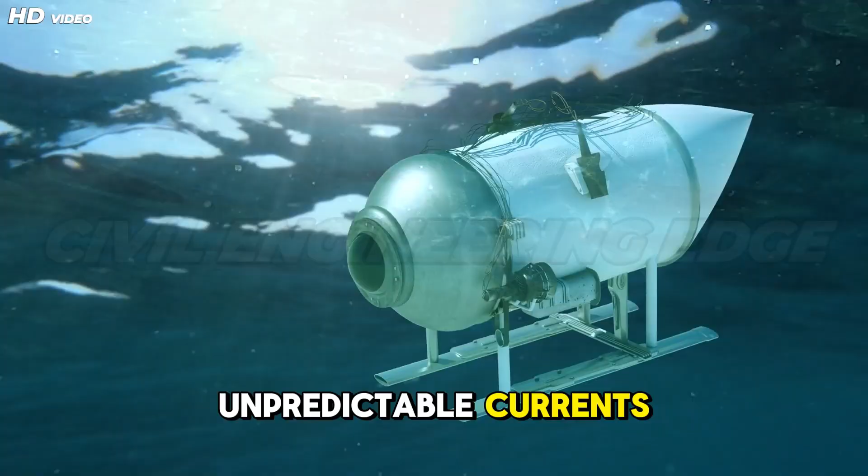Imagine building a bridge, but entirely underwater. No dry land, no stable ground, just crushing water pressure, unpredictable currents, and zero visibility. How do engineers pour concrete that doesn't wash away? How do they weld steel where humans can barely survive? And how do they stabilize structures that weigh more than skyscrapers on soft seabeds hundreds of feet below the surface?

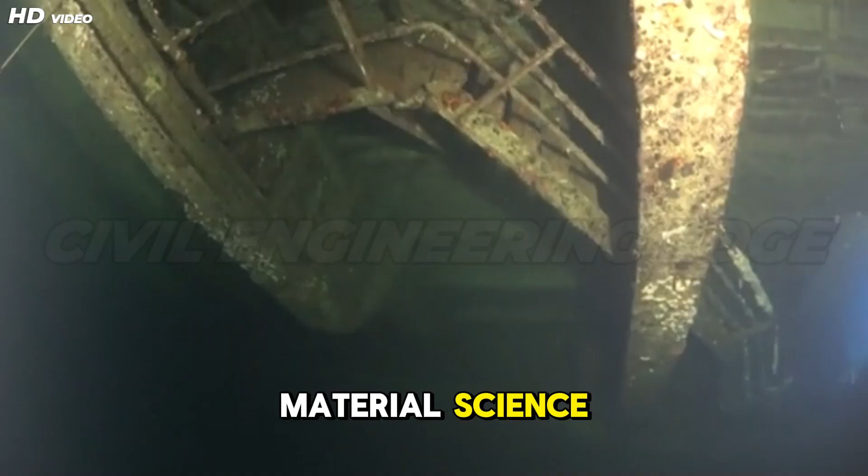Welcome to the astonishing world of underwater construction, where engineers don't just fight gravity, they fight the ocean itself. From submerged tunnels beneath busy shipping lanes to massive offshore foundations standing strong against waves and corrosion, this is a realm where precision, material science, and engineering courage collide. Today, we're diving deep into the secrets that make the impossible possible.

Diving into the deep. Why underwater construction? Underwater construction exists because the modern world refuses to stop at coastlines. As cities grow denser and transportation demands increase, engineers are forced to look beneath rivers, seas, and oceans to create faster, safer, and more efficient connections. Unlike traditional construction, underwater projects are not optional luxuries. They are engineering necessities driven by geography, population pressure, and global trade.

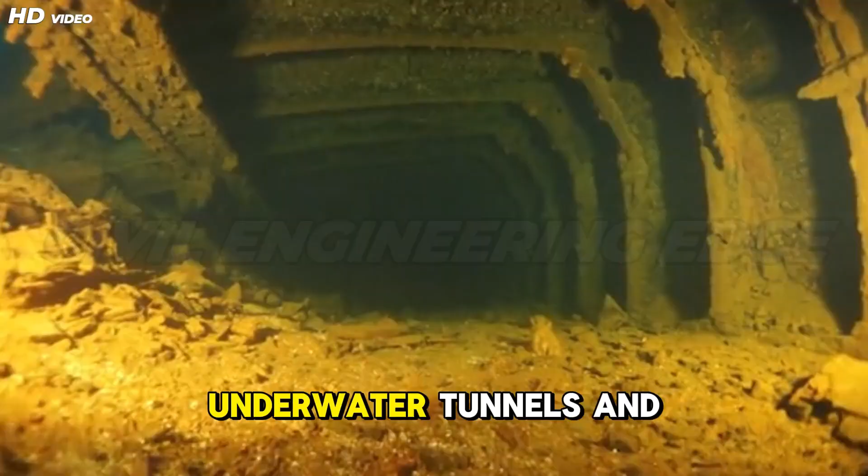Surface-level solutions such as bridges are not always feasible. Busy shipping lanes require unobstructed navigation. Deep waters make bridge foundations impractical, and environmental constraints limit above-water structures. In these situations, underwater tunnels and submerged foundations become the only viable solution. These projects allow uninterrupted transport while preserving the surface environment.

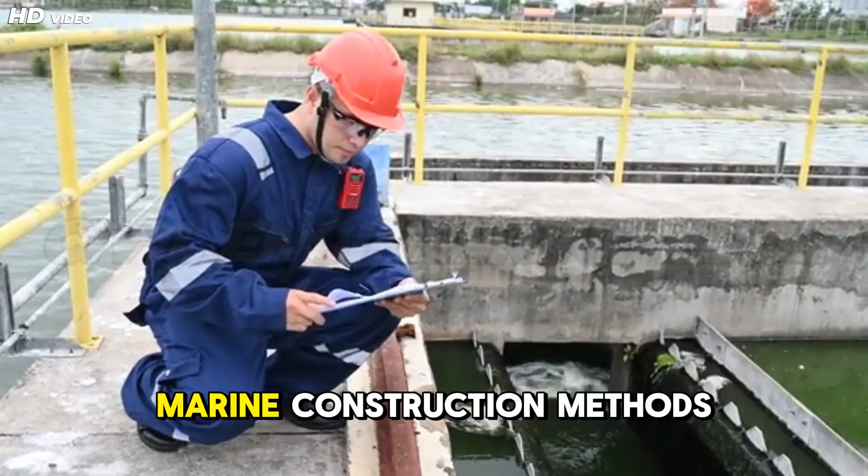But underwater construction is more than problem solving. It represents the evolution of civil engineering. It pushes boundaries in geotechnical engineering, structural design, marine construction methods, and material science. Every underwater project must address complex challenges such as hydrostatic pressure, buoyancy forces, seabed instability, corrosion, and long-term durability.

What makes underwater construction remarkable is not just the final structure, but the process itself. Engineers must design systems that can be built remotely, monitored digitally, and maintained for decades in hostile environments. Each project becomes a laboratory of innovation, where mistakes are costly and precision is non-negotiable. In essence, underwater construction exists because modern civilization demands connection without compromise, even when nature places the most extreme obstacles in the way.

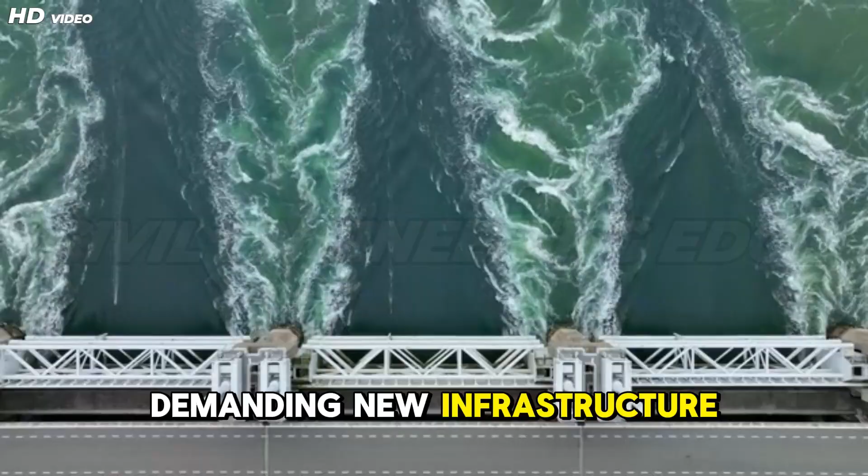Beyond bridges: the hidden world beneath the waves demanding new infrastructure. When most people think of infrastructure, they imagine roads, bridges, and skyscrapers. But beneath the water's surface lies a hidden world of critical infrastructure that keeps modern society functioning. This submerged realm includes transportation tunnels, offshore energy platforms, underwater pipelines, communication cables, and marine research facilities, systems that operate silently yet powerfully below the waves.

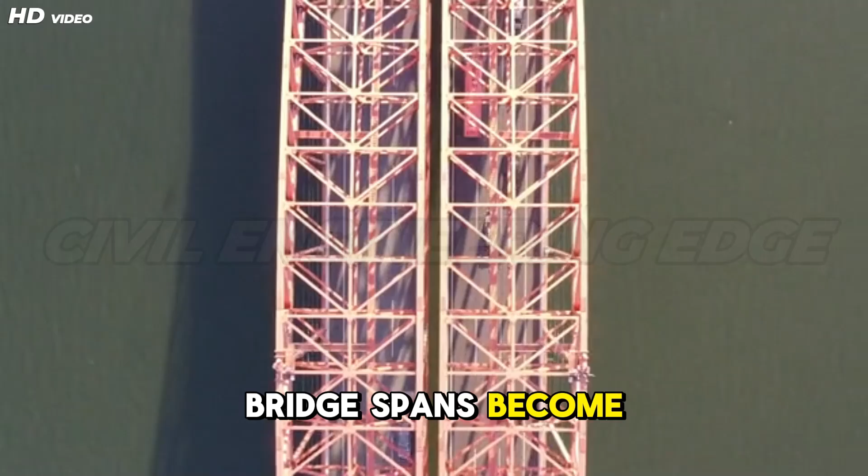Traditional bridges often dominate visual landscapes, but they come with limitations. In deep or wide water bodies, bridge spans become extremely expensive, vulnerable to ship collisions, and exposed to harsh weather conditions. Underwater tunnels eliminate these risks by passing below navigation channels, allowing uninterrupted maritime traffic while providing safer, more resilient transport routes.

Beyond transportation, underwater infrastructure supports global energy needs. Offshore wind turbines, oil and gas platforms, and subsea pipelines rely heavily on underwater construction techniques. These structures must anchor securely to seabeds that may consist of soft clay, sand, or fractured rock, each demanding specialized foundation solutions.

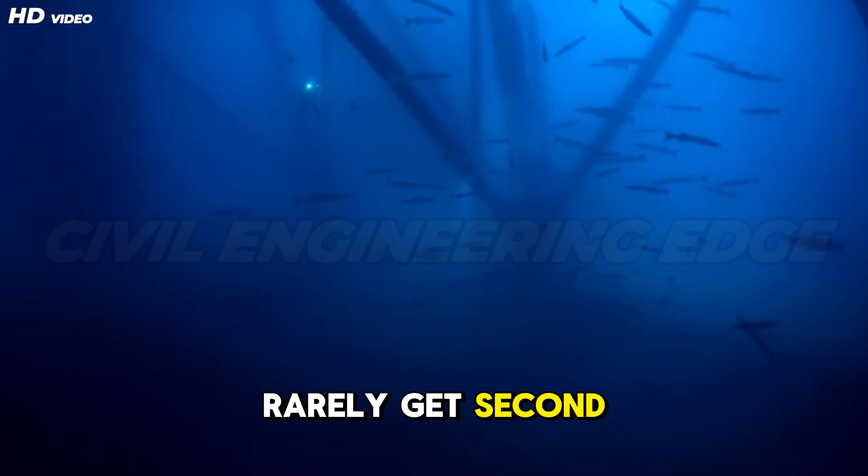The ocean floor is also home to vital communication networks. Submarine cables carry over 95% of global internet traffic, requiring precise installation and protection against currents, seismic activity, and human interference. What makes this underwater world extraordinary is that engineers rarely get second chances. Visibility is limited, access is difficult, and repairs are expensive. Every design decision must account for decades of service life under constant exposure to salt water, pressure, and biological activity.

Underwater construction isn't just about building below water, it's about creating invisible lifelines that support economies, security, and daily life across the planet.

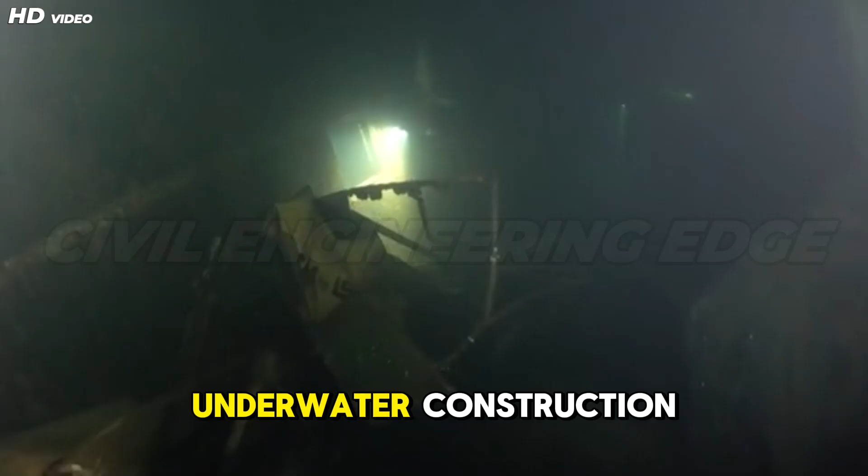Economic and strategic imperatives driving these ambitious projects. Underwater construction is not driven by curiosity alone, it is powered by economic necessity and strategic planning. In an interconnected global economy, delays in transportation, energy supply, or data transmission translate directly into financial losses. Submerged tunnels and offshore structures often provide the most efficient and long-term solutions.

From an economic perspective, underwater tunnels significantly reduce travel time between major urban centers, increasing productivity and regional integration. Cities separated by rivers or seas can function as a single economic zone when connected below water. This improves logistics, boosts tourism, and raises property values on both sides of the crossing.

Strategically, underwater infrastructure enhances national security and resilience. Subsea tunnels are less vulnerable to extreme weather, terrorism, or surface-level accidents compared to bridges. Military logistics, emergency evacuations, and essential supply routes benefit from protected underwater corridors.

Energy security is another major driver. Offshore oil, gas, and renewable energy installations require robust underwater foundations and pipelines to deliver power reliably. Countries investing in offshore wind farms depend heavily on underwater construction to meet sustainability goals and reduce carbon emissions.

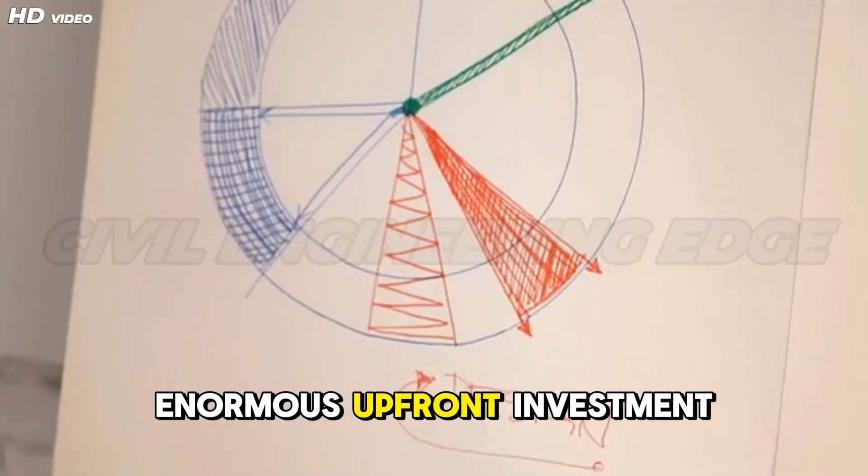There is also a geopolitical dimension. Nations compete to control trade routes, seabed resources, and communication networks. Advanced underwater construction capability reflects technological leadership and engineering strength. Although these projects demand enormous upfront investment, their long-term economic returns often outweigh costs. When designed correctly, underwater structures can serve reliably for 100 years or more, making them strategic assets rather than expenses.

The sheer scale and engineering audacity required to build underwater. Building underwater is not just difficult, it is audacious. Engineers must plan projects where gravity, buoyancy, pressure, and corrosion all work against them simultaneously. Unlike surface construction, where adjustments can be made easily, underwater construction demands near-perfect execution from the very beginning.

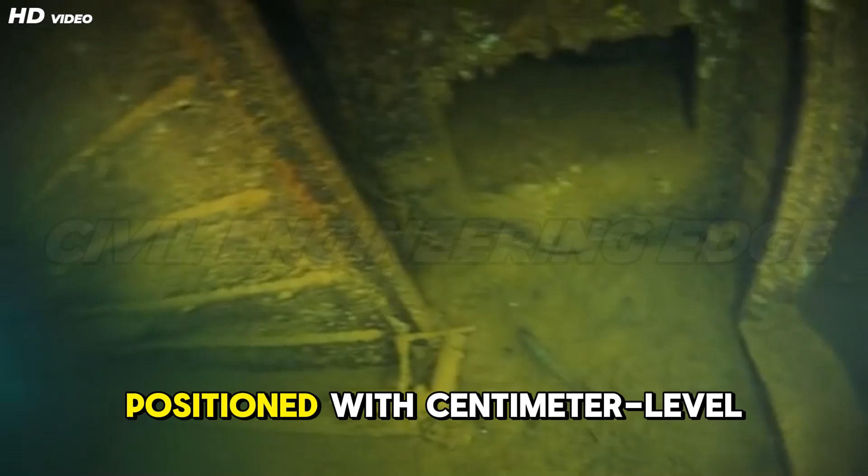Consider the scale alone. Immersed tunnel elements can weigh tens of thousands of tons, yet they must be floated, positioned with centimeter-level accuracy, and sunk into prepared trenches on the seabed. All this happens while accounting for tides, currents, and weather windows that may last only a few hours.

Hydrostatic pressure increases dramatically with depth, placing extreme stress on structures and construction equipment. At the same time, buoyant forces try to lift massive components upward, requiring precise ballast control. Engineers must design systems that remain stable during construction and for decades afterward.

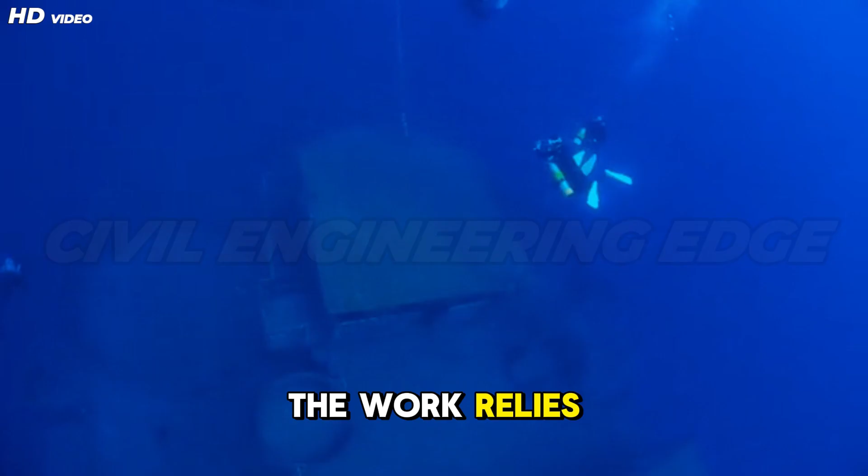Human access is limited, so much of the work relies on remotely operated vehicles, divers trained for high-risk environments, and advanced monitoring systems. Every weld, joint, and seal must perform flawlessly because underwater repairs are complex and expensive.

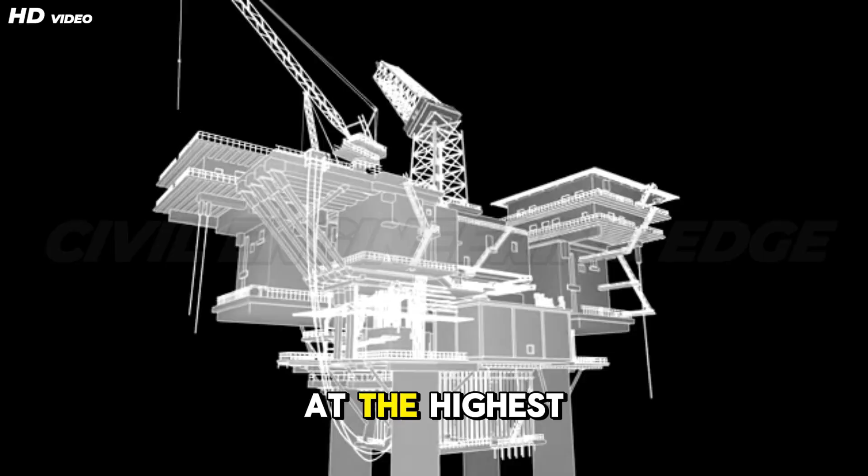What truly defines underwater construction is the engineering mindset, a willingness to operate where failure is not an option. These projects combine structural engineering, geotechnical analysis, fluid mechanics, material science, and project management at the highest level. In short, underwater construction is where civil engineering proves its boldest claim. If it can be imagined, it can be built, even beneath the ocean floor.

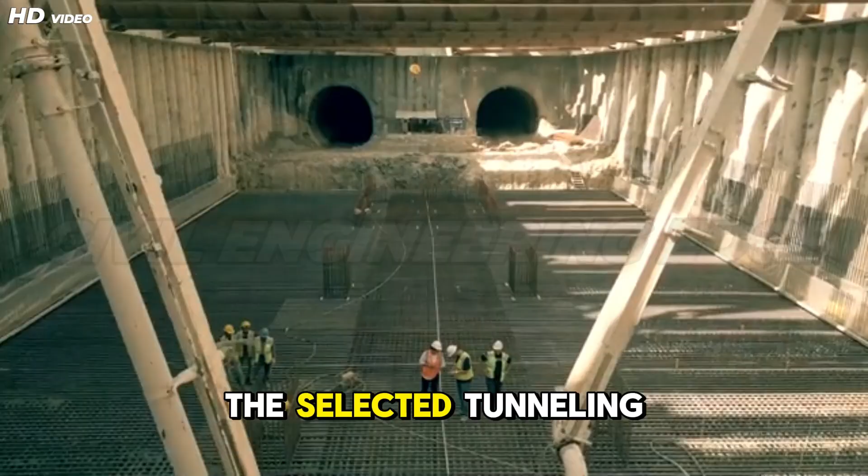The blueprint for submerged passages: tunneling techniques. When engineers decide to build a tunnel underwater, the first and most critical question is how. Unlike land tunnels, underwater tunnels must resist hydrostatic pressure, prevent leakage, and remain stable on or beneath soft seabeds. The selected tunneling technique becomes the backbone of the entire project, influencing cost, construction time, safety, and long-term durability.

Underwater tunneling techniques are broadly categorized based on geology, water depth, environmental conditions, and navigation requirements above. Shallow water crossings often favor construction on the seabed itself, while deeper or rockier conditions demand excavation through the ground below. Each method comes with its own engineering philosophy and risk profile.

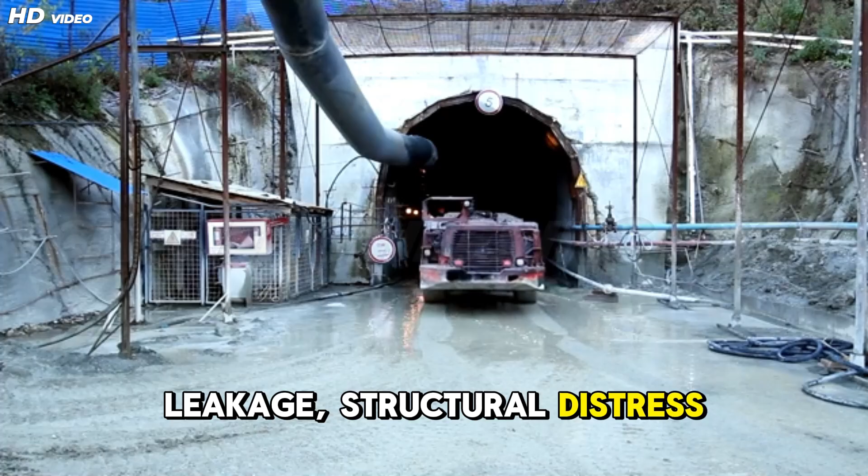Precision planning begins long before construction starts. Engineers conduct extensive bathymetric surveys, geotechnical investigations, seismic studies, and hydraulic modeling. These studies determine soil strength, rock quality, groundwater pressure, and potential settlement risks. Even minor miscalculations can lead to leakage, structural distress, or catastrophic failure.

Unlike bridges, where visibility allows continuous inspection, underwater tunnels must be designed as sealed systems capable of resisting water ingress for decades. Structural linings, waterproof membranes, and joint systems must work perfectly together.

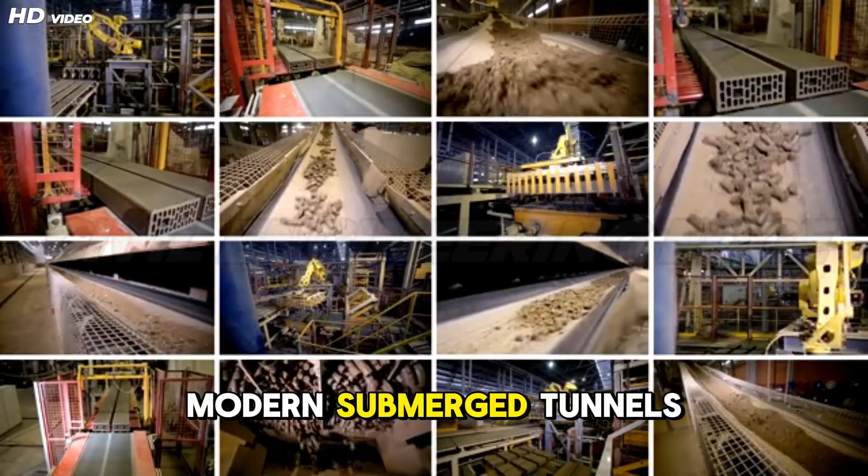Modern submerged tunnels represent a fusion of structural engineering, marine construction, and advanced machinery. From floating massive concrete sections into position to boring deep beneath riverbeds with tunnel boring machines, underwater tunneling showcases the peak of civil engineering coordination. At its core, underwater tunneling is not just about excavation, it is about mastering the environment where water dominates every design decision.

Immersed tube method: prefabricated sections sunk and joined. The immersed tube method is one of the most iconic and visually fascinating techniques in underwater tunnel construction. Instead of digging entirely underground, engineers build massive tunnel sections called elements on land in controlled casting yards. These reinforced concrete or steel elements are typically 100 to 150 meters long and weigh thousands of tons.

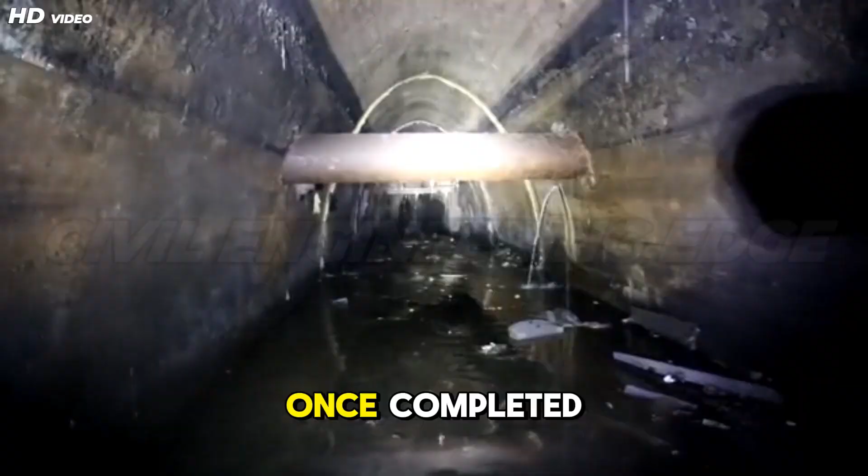Once completed, each element is sealed at both ends and floated like a ship to the tunnel site. A carefully dredged trench is prepared on the seabed, often lined with gravel or bedding material for uniform support. Using GPS positioning, ballast tanks, and tugboats, engineers slowly sink the tunnel element into the trench with millimeter-level accuracy.

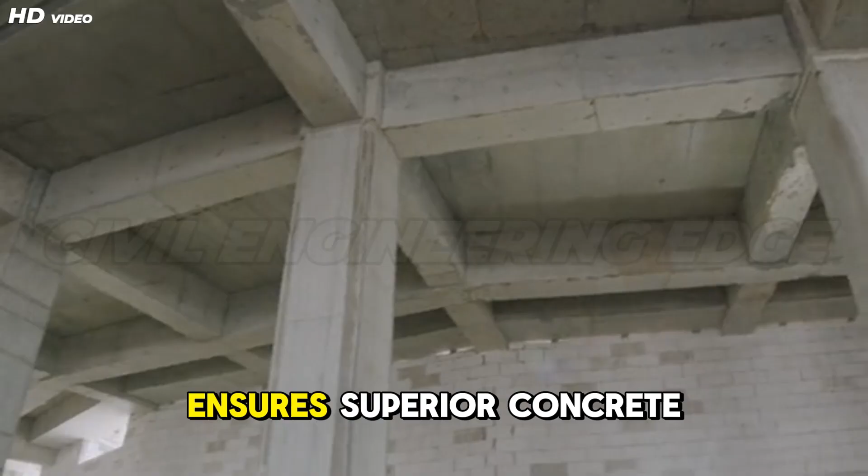This method has been widely adopted in Asia for large-scale projects such as underwater metro systems and sea crossings, where shallow water depths and soft marine soils are common. The controlled prefabrication ensures superior concrete quality, better waterproofing, and faster installation compared to in situ construction.

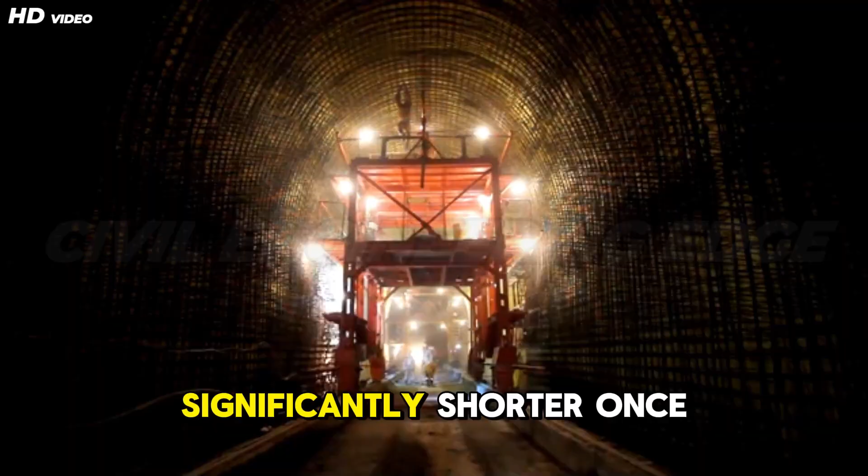One of the biggest advantages of the immersed tube method is reduced disruption to surface navigation. Shipping traffic can continue above while tunnel elements are placed below. Additionally, construction time is significantly shorter once installation begins.

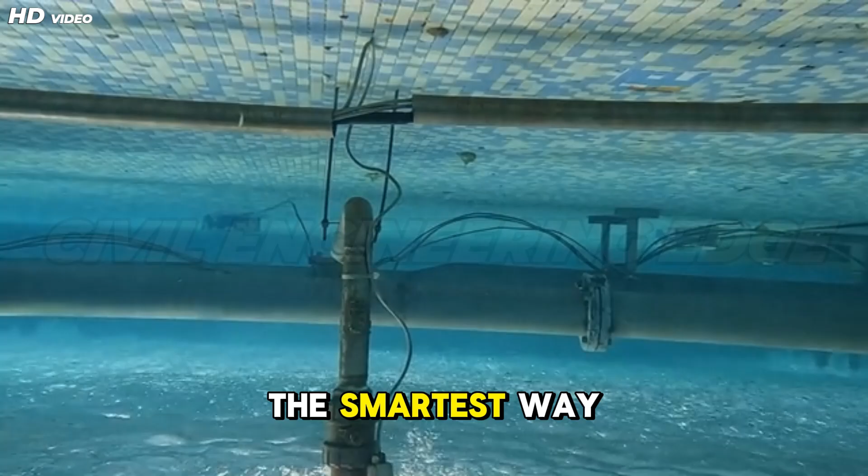However, the method demands extreme precision. Any misalignment during placement can compromise joint integrity. Engineers must also account for buoyancy forces, seabed settlement, and seismic activity. The immersed tube method proves that sometimes the smartest way to build underwater is not to dig, but to assemble.

Bored tunnels, giant TBMs beneath rivers and seas. When water depths increase or seabed conditions become complex, engineers turn to bored tunnels constructed using tunnel boring machines, or TBMs. These massive machines, sometimes over 15 meters in diameter, excavate tunnels deep beneath riverbeds or seabeds, adapting land-based tunneling technology for underwater challenges.

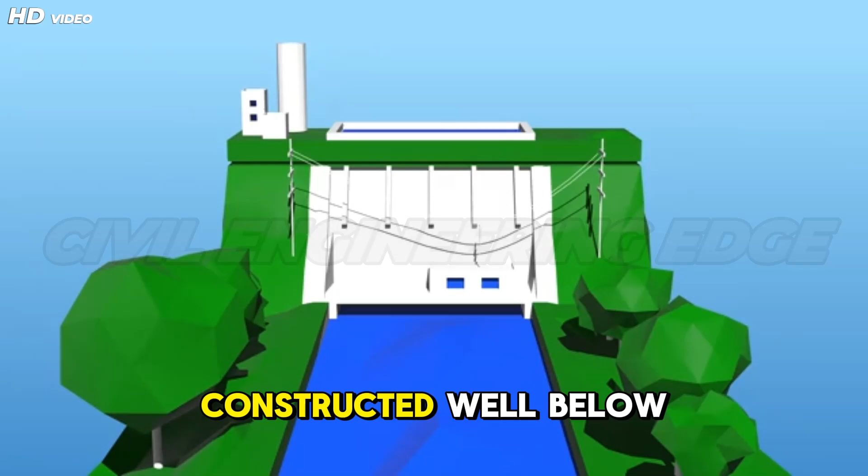Underwater bored tunnels are typically constructed well below the seabed to avoid direct water pressure and navigation risks. The surrounding soil or rock acts as a natural barrier, but groundwater pressure remains a major concern. To address this, specialized TBMs such as Earth Pressure Balance (EPB) or Slurry Shield TBMs are used. These machines maintain pressure at the tunnel face, preventing water and soil from rushing in.

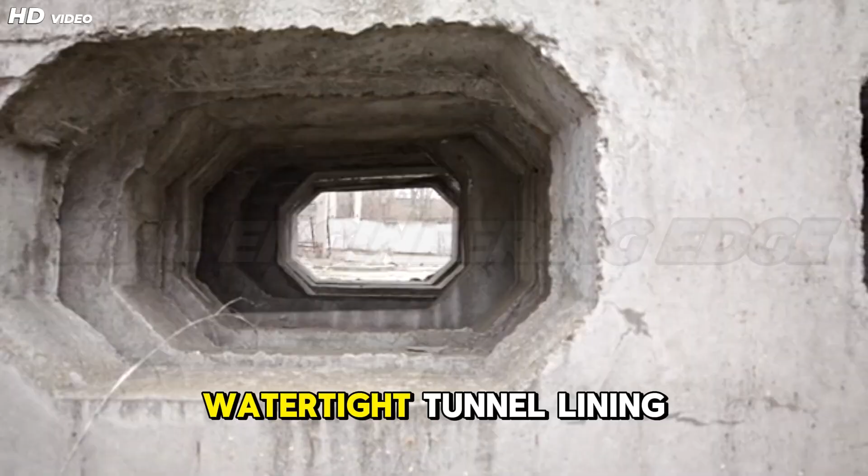As the TBM advances, it installs precast concrete lining segments immediately behind the cutter head, forming a continuous, watertight tunnel lining. One major advantage of bored tunnels is minimal impact on marine ecosystems and surface activities. Since excavation happens deep underground, shipping lanes, ports, and coastal infrastructure remain unaffected.

However, bored tunneling underwater requires extreme control. Variations in soil layers, high pore water pressure, and machine breakdowns can lead to ground settlement or flooding. Continuous monitoring of face pressure, settlement, and alignment is essential. Bored tunnels represent engineering patience and precision. Unlike immersed tubes, progress is slow but highly controlled. They are a testament to how civil engineering adapts traditional methods to conquer one of the most hostile construction environments on Earth.

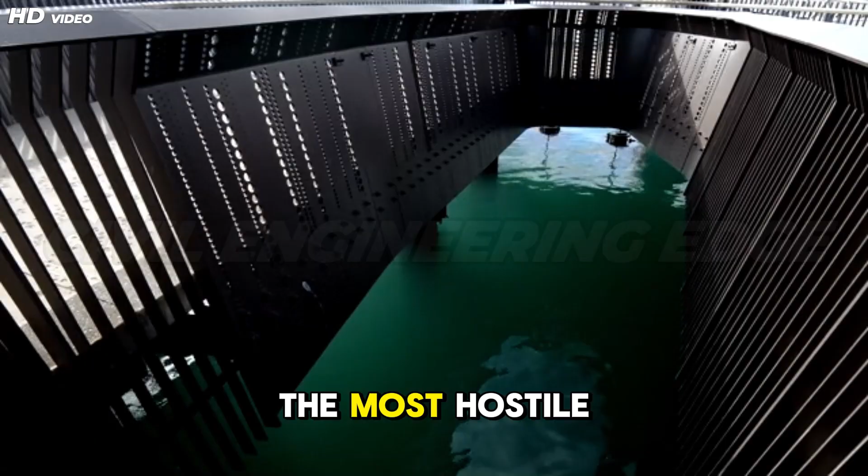Connecting the sections, watertight seals under immense pressure. The most critical moment in underwater tunnel construction is not excavation, it is connection. Whether using immersed tubes or bored tunnels, creating a perfectly watertight joint under immense water pressure is a true engineering test.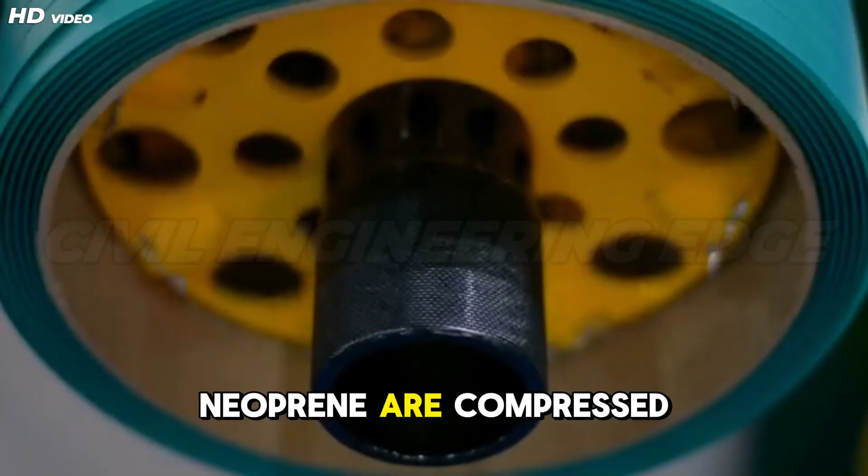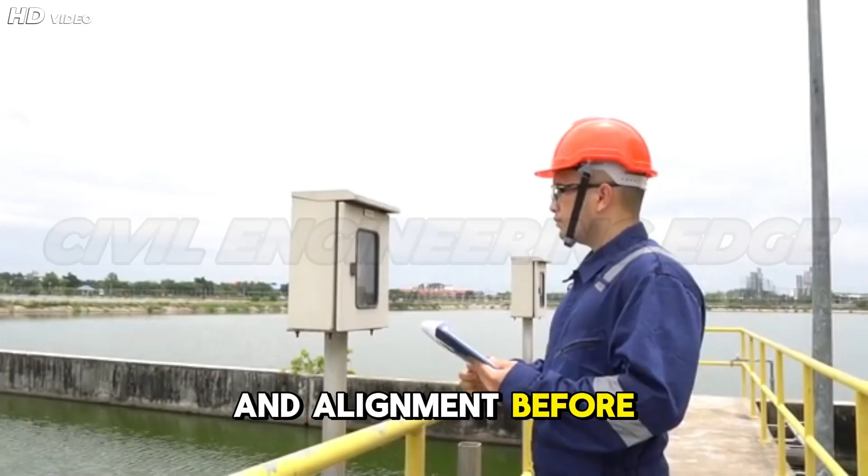In immersed tube tunnels, each prefabricated element is joined underwater using advanced sealing systems. Rubber gaskets often made of synthetic neoprene are compressed between tunnel segments. When the elements are pulled together using hydraulic jacks, the gasket deforms, creating a tight seal capable of withstanding external water pressure. Temporary bulkheads are removed only after the joint is confirmed watertight. Engineers monitor leakage, pressure behavior, and alignment before proceeding to the next element. A single faulty joint can compromise the entire tunnel.

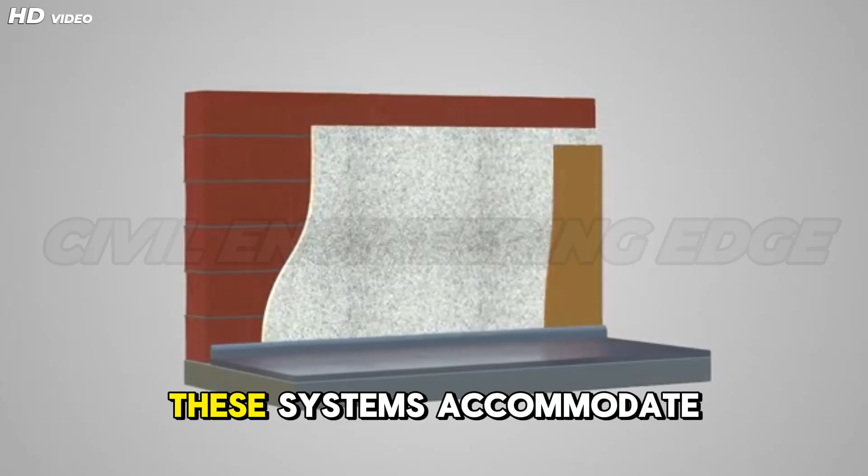For bored tunnels, precast lining segments are bolted together with precision. Each segment joint contains multiple sealing layers, including elastomeric gaskets and secondary waterproof membranes. These systems accommodate slight movements caused by temperature changes, settlement, or seismic activity. Water pressure at depth can exceed several bars, meaning even microscopic gaps can lead to long-term seepage. Therefore, joint tolerances are measured in millimeters, and quality control is relentless.

Advanced sensors are embedded to monitor joint behavior throughout the tunnel's life. Modern tunnels are not just sealed, they are actively monitored systems. In underwater construction, a tunnel is only as strong as its weakest joint. That's why connecting sections beneath the water isn't just construction, it is engineering precision at its absolute finest.

Anchoring giants, building offshore structures. Offshore structures, whether oil platforms, wind turbines, or subsea terminals, face forces unlike any land-based construction. Waves, currents, tides, wind, and seismic activity act simultaneously, while corrosion and fatigue work silently over decades. The greatest challenge is not building upward, but anchoring downward into an unpredictable seabed.

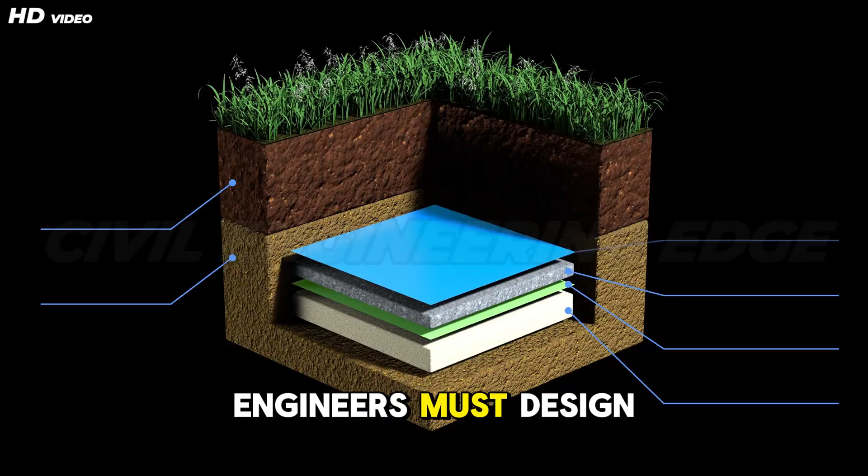Unlike buildings on land, offshore structures cannot rely on shallow foundations. The seabed may consist of soft clay, loose sand, or fractured rock, each behaving differently under load. Engineers must design foundations that resist vertical loads, lateral wave forces, uplift due to buoyancy, and cyclic fatigue caused by continuous wave action. Foundation choice depends on water depth, soil conditions, environmental loads, and construction feasibility.

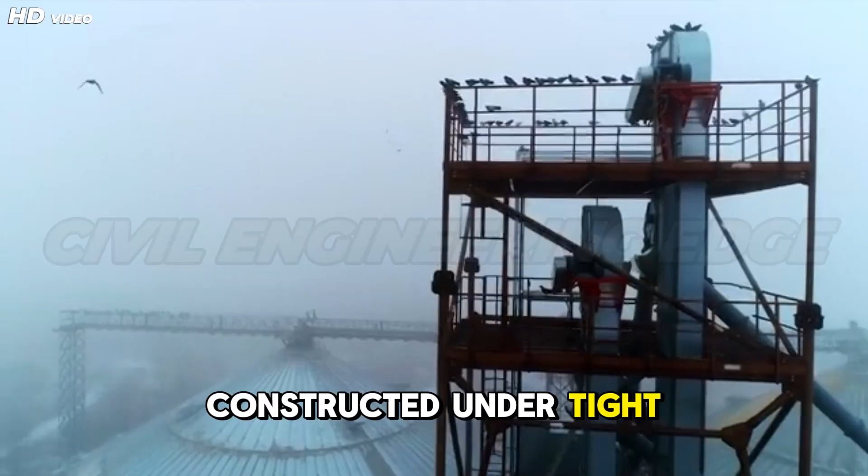Shallow waters with strong seabeds favor massive gravity-based systems, while deeper waters or weaker soils demand pile-supported foundations. Each solution requires precise geotechnical analysis and extensive physical modeling. Offshore foundations are typically constructed under tight weather windows. A small miscalculation in timing or positioning can delay projects by months. Once installed, these foundations must perform with minimal maintenance, often for 30 to 100 years.

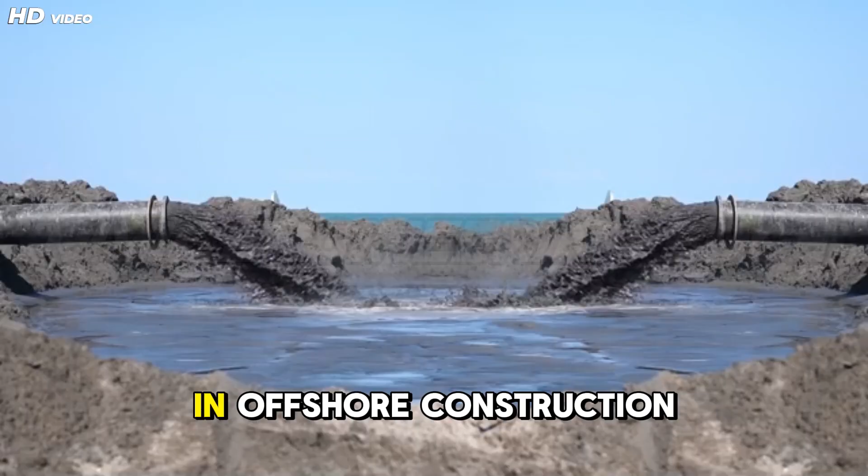What makes offshore foundation engineering remarkable is its scale. Individual foundation units can weigh more than skyscrapers, yet must be placed with centimeter-level accuracy on the ocean floor. In offshore construction, foundations are not just supports, they are the difference between structural stability and total failure.

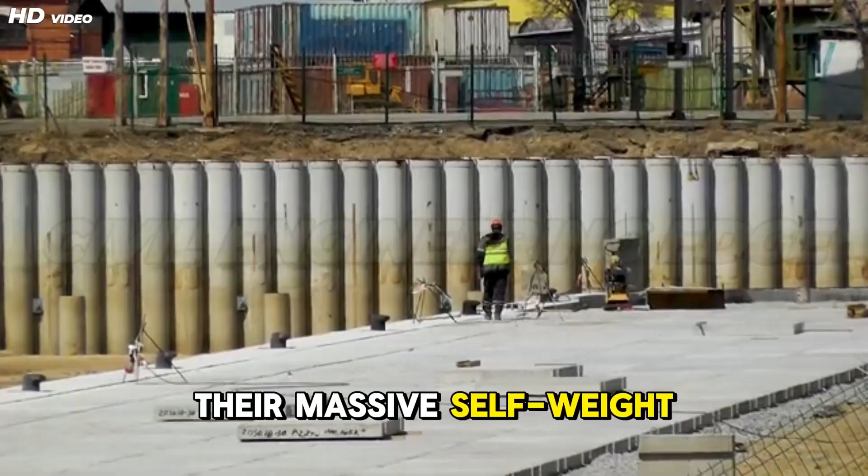Gravity-based foundations, massive concrete caissons. Gravity-based foundations, or GBFs, rely on one powerful principle: weight. These foundations are enormous concrete structures, known as caissons, designed to resist environmental forces simply by their massive self-weight. Once placed on the seabed, gravity alone keeps them firmly anchored.

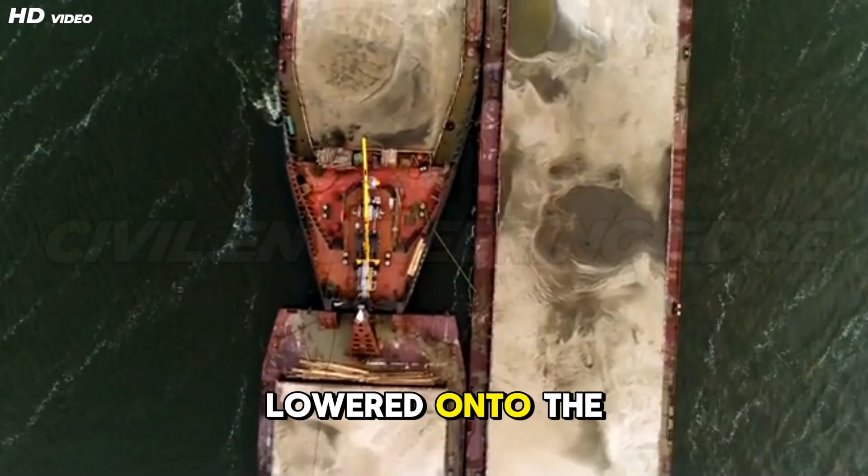GBFs are typically constructed in dry docks or coastal fabrication yards. High-strength reinforced concrete is used to form hollow caissons, which are then floated to the offshore site. After precise positioning, the caissons are slowly lowered onto the seabed. Once in place, the hollow chambers are filled with ballast materials such as sand, gravel, or seawater. This added mass increases stability, allowing the structure to resist wave action, sliding, overturning, and uplift forces caused by buoyancy.

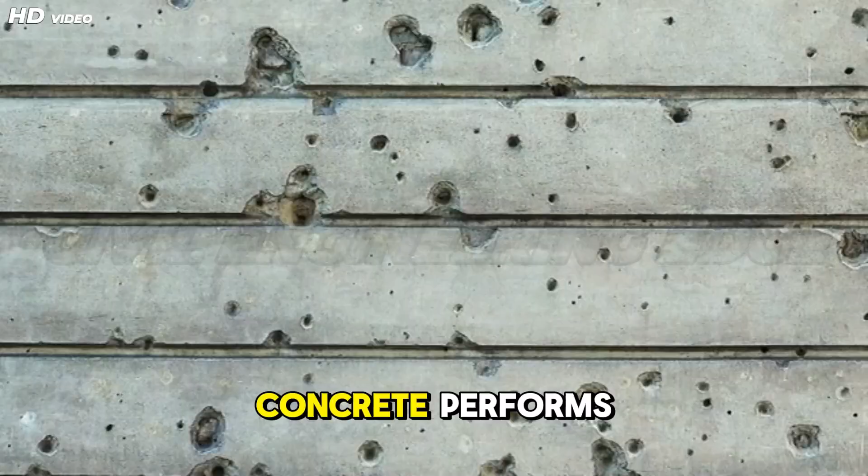Gravity-based foundations are commonly used for offshore oil platforms and wind turbines in shallow to moderate water depths. They perform exceptionally well on firm seabeds and offer excellent resistance to fatigue loads. One major advantage of GBFs is durability. Concrete performs well in marine environments when properly designed, offering high resistance to corrosion compared to steel. Maintenance requirements are relatively low over the structure's life.

However, GBFs require extensive seabed preparation. The seabed must be leveled and strengthened to avoid differential settlement. Transporting and installing such massive structures also demands specialized vessels and calm weather conditions. Gravity-based foundations demonstrate how engineering sometimes chooses brute force executed with precision to conquer the ocean.

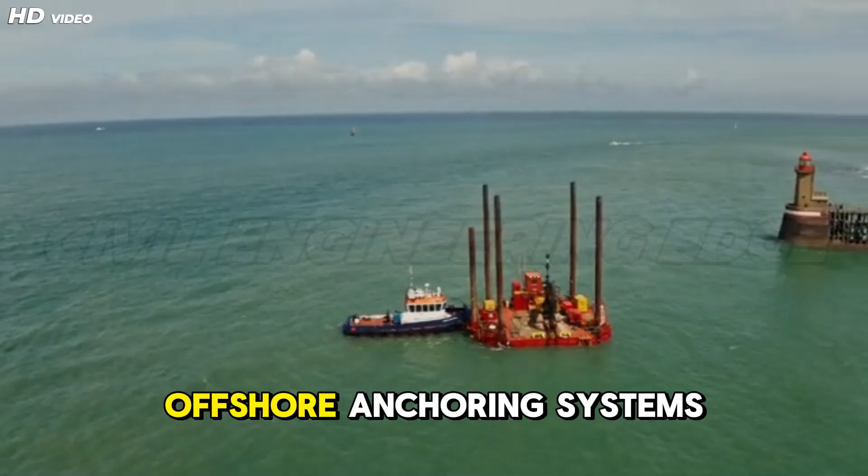Pile foundations: driving colossal piles into the seabed. When gravity alone isn't enough, engineers turn to pile foundations, one of the most versatile and reliable offshore anchoring systems. These foundations use long, slender piles driven deep into the seabed to transfer loads to stronger soil or rock layers below. Offshore piles are typically made of steel and can reach diameters of several meters and lengths exceeding 80 meters.

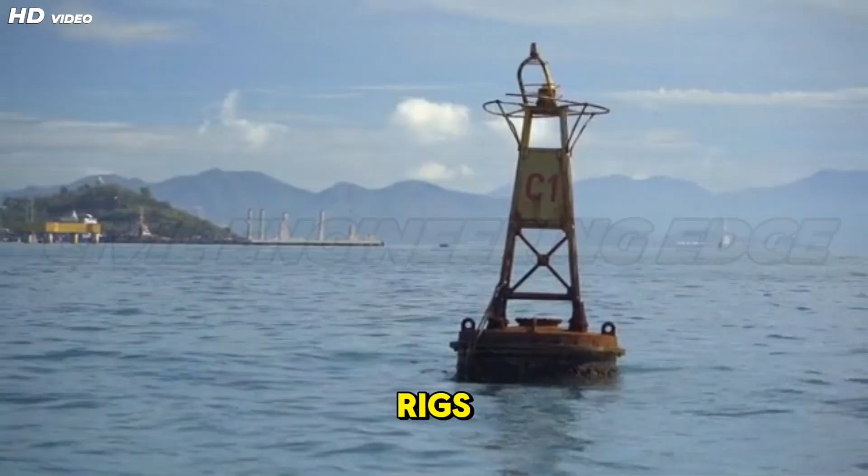They are installed using hydraulic hammers or vibratory drivers mounted on floating platforms or jack-up rigs. Each pile must be driven with extreme accuracy to achieve the required penetration depth and alignment. Pile foundations excel in challenging ground conditions such as soft clay, layered soils, or deep water. They resist vertical loads, lateral wave forces, and cyclic fatigue caused by repeated wave action. Groups of piles are often used to distribute loads and enhance stability.

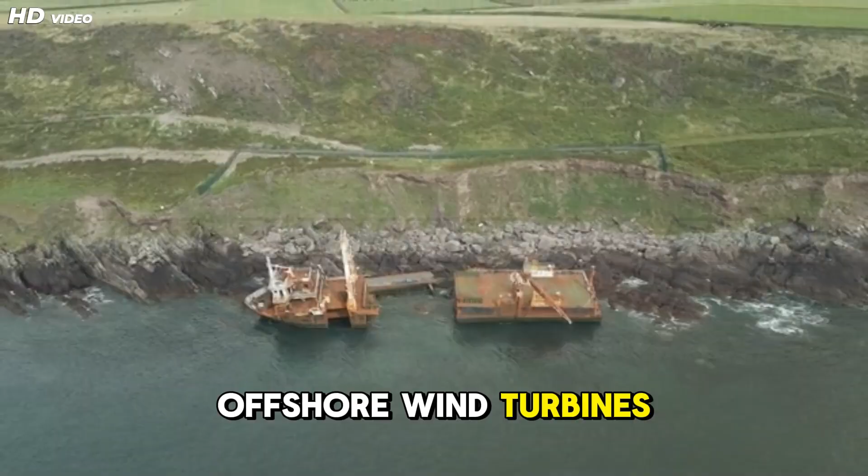A key engineering challenge is predicting pile behavior under dynamic marine loads. Engineers rely on advanced soil modeling, pile load testing, and real-time monitoring during installation to ensure performance. Pile foundations are widely used for offshore wind turbines, bridges, and deep water platforms. Their modular nature allows flexibility in design and easier adaptation to varying seabed conditions.

However, pile driving generates noise and vibrations, which can impact marine life. Modern projects incorporate noise mitigation techniques such as bubble curtains and controlled hammering. Pile foundations showcase engineering adaptability, going deep when surface stability cannot be trusted.

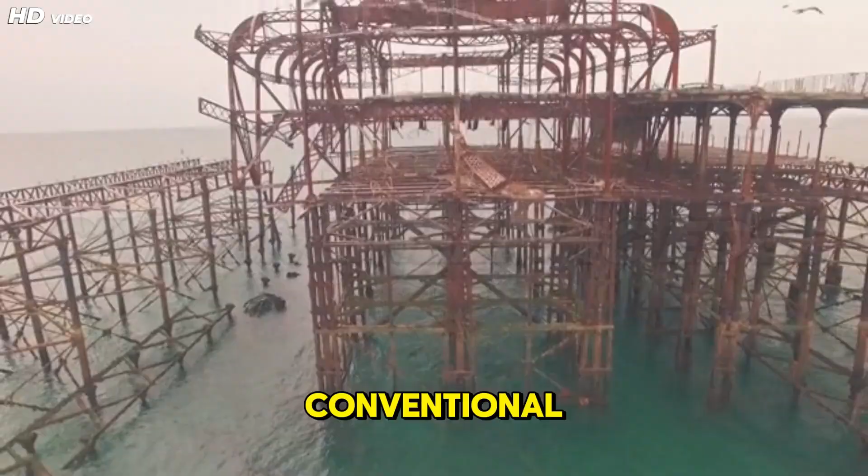The evolution of materials, from steel to self-healing concrete. Materials are the silent heroes of underwater construction. Early offshore structures relied heavily on conventional steel and concrete, but harsh marine environments quickly exposed their limitations. Today, materials science plays a critical role in ensuring long-term durability and safety.

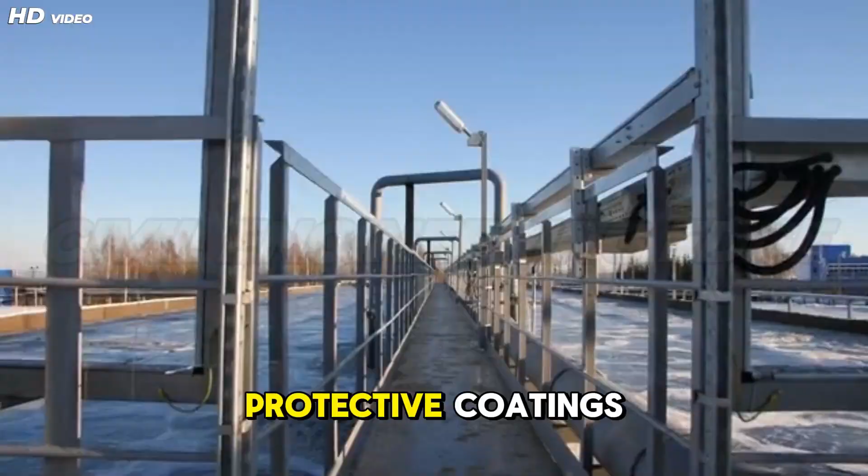Steel remains widely used due to its high strength and flexibility, especially in pile foundations and jacket structures. However, corrosion caused by salt water is a constant threat. Protective coatings, cathodic protection systems, and corrosion-resistant alloys are now standard design elements.

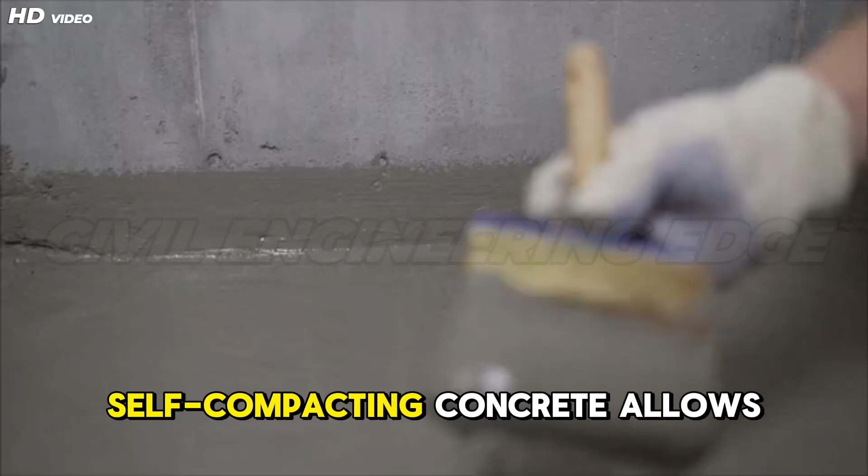Concrete has evolved dramatically for marine use. Modern underwater concrete includes low permeability mixes, supplementary cementitious materials, and chemical admixtures that improve durability. Self-compacting concrete allows placement underwater without segregation, ensuring uniform strength.

One of the most exciting advancements is self-healing concrete. Embedded microcapsules or bacteria activate when cracks form, producing minerals that seal the cracks automatically. This significantly extends service life and reduces maintenance needs. Advanced composites, such as fiber-reinforced polymers (FRP), are increasingly used for strengthening and corrosion protection. These materials are lightweight, highly durable, and resistant to marine degradation.

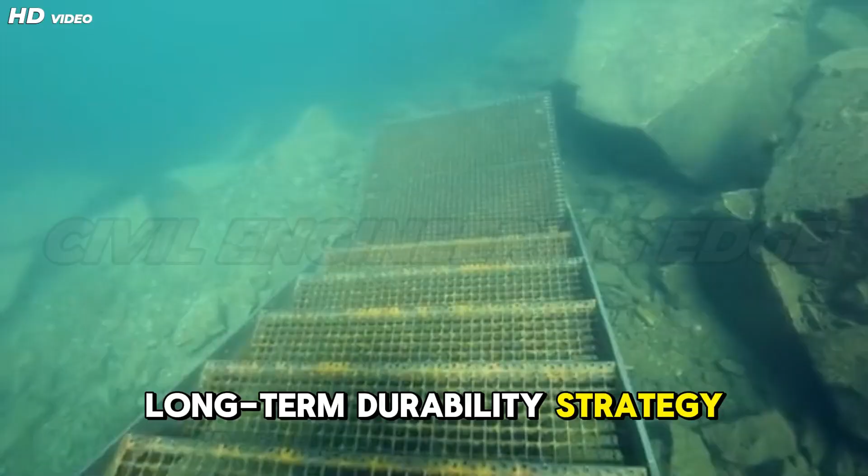The evolution of materials has transformed underwater construction from a constant maintenance battle into a long-term durability strategy. In the ocean, where repairs are costly and difficult, smart materials are not a luxury, they are a necessity.

Battling the deep: overcoming immense pressures and corrosive environments. Underwater construction is not simply about building below water, it is about surviving the deep. Unlike land-based structures, underwater systems face constant physical and chemical attacks from their environment. Pressure, corrosion, waves, and seismic forces act continuously, not occasionally.

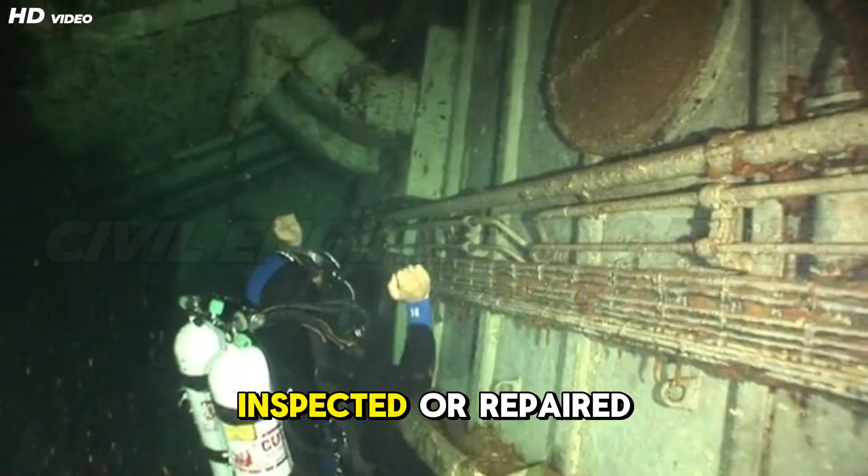At increasing depths, hydrostatic pressure rises rapidly, placing enormous compressive loads on structural elements. Simultaneously, seawater aggressively corrodes metals, penetrates concrete, and weakens materials over time. Unlike surface structures, underwater installations cannot be easily inspected or repaired, making durability a primary design objective.

In addition to static forces, underwater structures must withstand dynamic actions. Waves, tides, and currents generate cyclic loads that cause fatigue. Seismic events introduce sudden ground motions, while scour alters seabed support conditions unexpectedly.

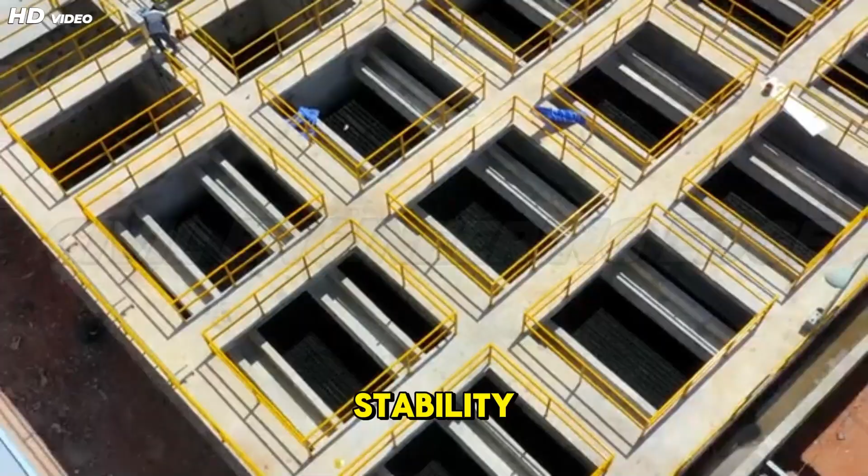To combat these challenges, engineers adopt a multi-layered defense strategy. Structural geometry, material selection, protective systems, and monitoring technologies all work together to ensure long-term stability. Safety factors are higher, redundancy is mandatory, and design life expectations often exceed 50 to 100 years. Every underwater structure represents a balance between resisting nature and adapting to it. Failure to account for even one environmental factor can lead to catastrophic consequences.

This battle with the deep defines the discipline of marine and offshore engineering, where survival is not measured in days or years, but in generations of service beneath the sea.

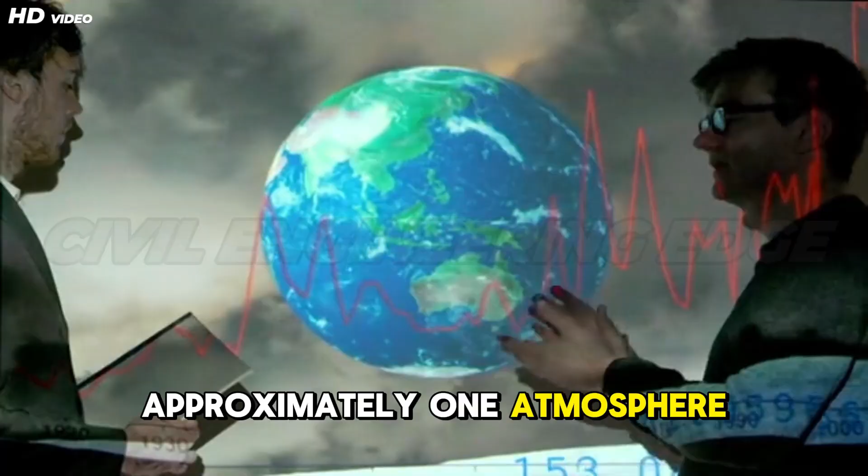Hydrostatic pressure, engineering against crushing forces. Hydrostatic pressure is one of the most unforgiving forces in underwater construction. For every 10 meters of water depth, pressure increases by approximately 1 atmosphere. At significant depths, this translates into forces capable of crushing submarines, let alone conventional structures.

Underwater tunnels, foundations, and offshore platforms must be designed to resist this pressure continuously. Unlike transient loads such as wind, hydrostatic pressure acts uniformly and relentlessly on every exposed surface. Even small openings or weak joints can become points of failure.

Engineers respond by optimizing structural shapes and thicknesses. Circular and curved sections are preferred because they distribute pressure evenly, minimizing stress concentrations. Tunnel linings, caissons, and offshore shells are designed as pressure-resisting structures rather than load-carrying frames.

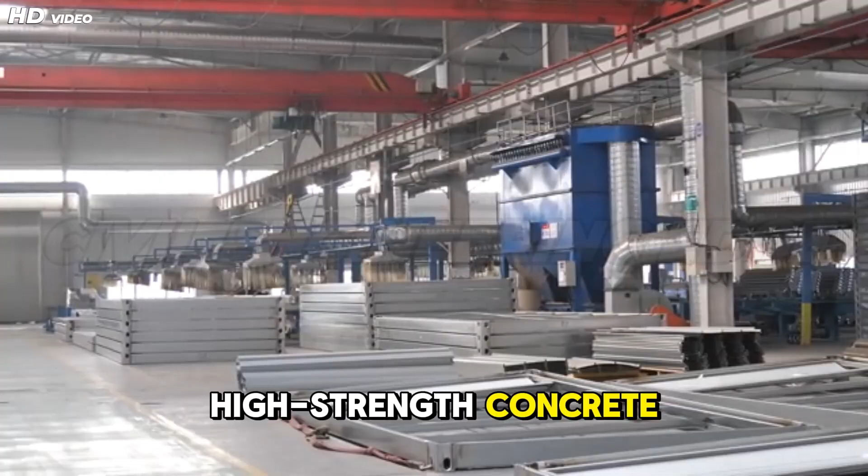Material selection is critical. High-strength concrete with low permeability reduces water ingress, while steel components are designed with sufficient thickness to prevent buckling. Waterproof membranes and multi-layer sealing systems add additional protection.

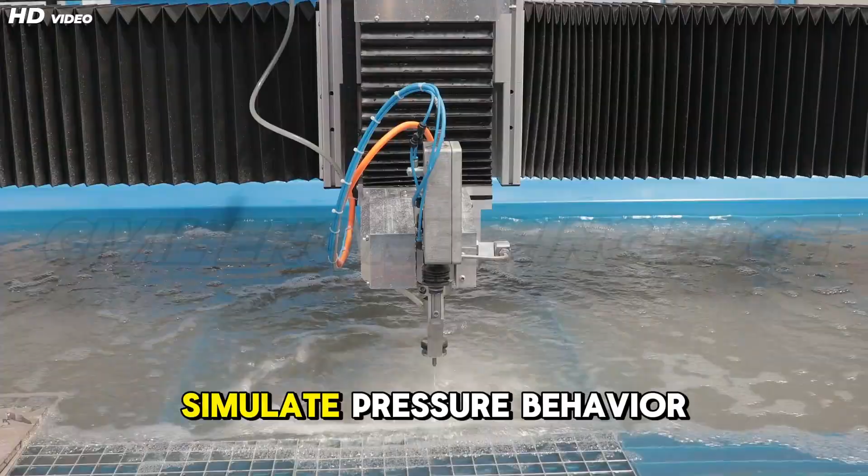Construction stages are equally important. During installation, partially completed structures may experience uneven pressure distribution, requiring temporary supports or controlled flooding to equalize forces. Advanced numerical modeling and physical scale testing help engineers simulate pressure behavior before construction begins. Sensors embedded in structures continue to monitor pressure effects throughout service life.

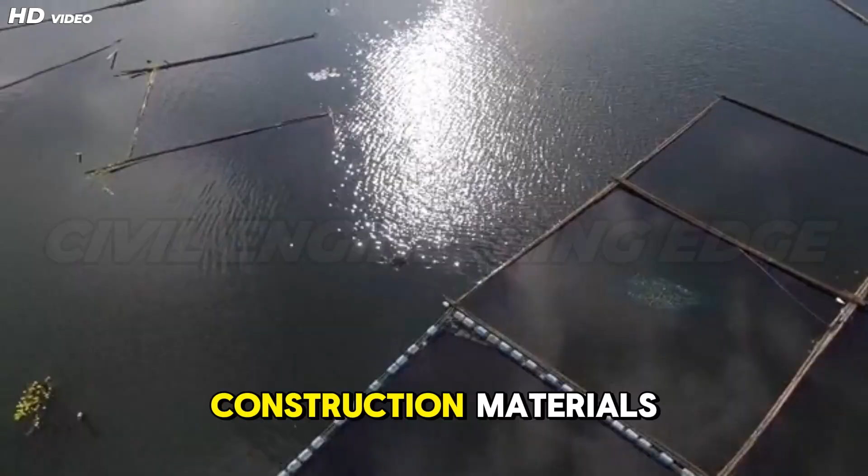In underwater engineering, pressure is not an occasional threat, it is a constant opponent, demanding precision, foresight, and respect in every design decision. Corrosion's relentless assault, protecting structures from the sea. Seawater is one of the most aggressive environments for construction materials. Salt, oxygen, and moisture combine to create a perfect setting for corrosion, particularly for steel components used in offshore and underwater structures. Left unprotected, corrosion can reduce structural capacity dramatically within a few years.

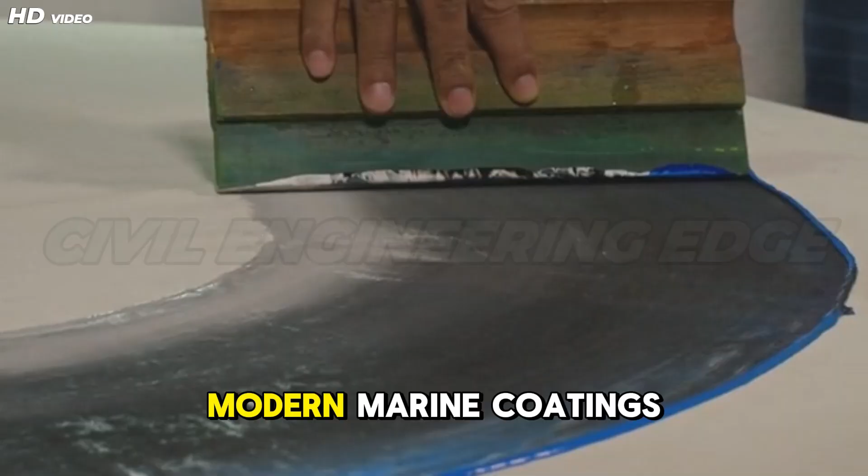To combat this, engineers employ advanced protective systems. The first line of defense is protective coatings. Modern marine coatings include epoxy, polyurethane, and multi-layer systems designed to resist abrasion, chemical attack, and biological growth. These coatings form a barrier that isolates steel from seawater.

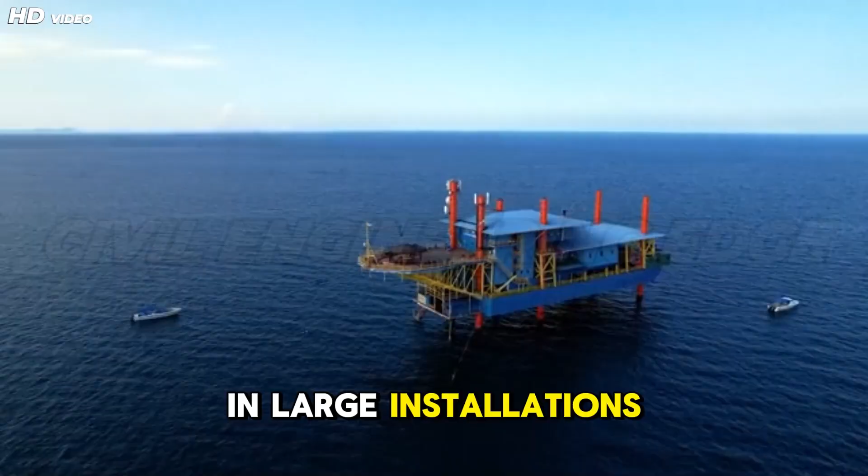The second line of defense is cathodic protection. This technique controls corrosion by making the structure the cathode of an electrochemical cell. Sacrificial anodes made of zinc or aluminum corrode instead of the structure, preserving the steel. In large installations, impressed current systems are used to provide continuous protection.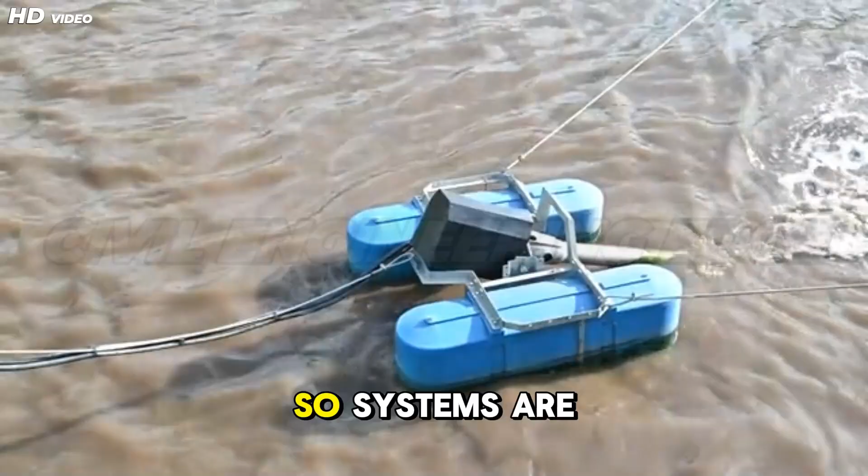Concrete structures are also vulnerable. Chloride ions penetrate concrete and initiate corrosion of embedded reinforcement. Engineers counter this using low-permeability concrete mixes, corrosion inhibitors, epoxy-coated rebars, and increased concrete cover. Regular inspection is challenging underwater, so systems are designed with redundancy and long-term performance in mind. Sensors and remotely operated vehicles assist in monitoring corrosion activity.

Corrosion never sleeps. In underwater construction, protection systems are not optional accessories, they are structural necessities that define service life and safety. Seismic and dynamic wave forces. Designing for the ocean's unpredictable power. The ocean is never still. Waves, currents, and seismic events introduce dynamic forces that make underwater construction especially complex. Unlike static loads, these forces vary in magnitude, direction, and frequency, creating fatigue and instability over time.

Wave action generates cyclic lateral loads on offshore structures, leading to vibration and repeated stress reversals. Over decades, this can cause fatigue cracking in steel and micro-cracking in concrete. Engineers must design for millions of load cycles, not just peak forces.

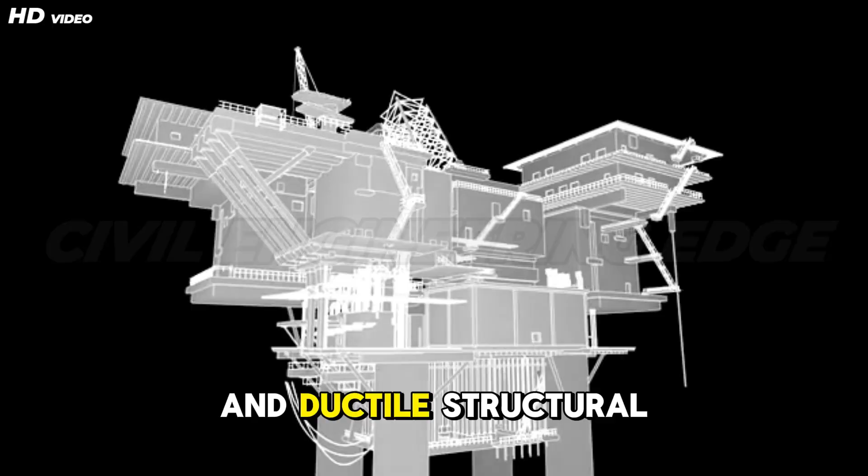Seismic activity adds another layer of complexity. Underwater tunnels and offshore foundations may experience ground shaking, seabed liquefaction, and sudden displacement. In seismic zones, structures must accommodate movement without losing watertight integrity or stability. Design strategies include flexible joints, energy dissipating systems, and ductile structural detailing. Pile foundations are often designed to bend without breaking, while tunnel linings allow controlled deformation.

Scour caused by wave-induced currents can remove seabed material around foundations, reducing support. Engineers counter this with rock armoring, mattresses, and continuous seabed monitoring. Advanced hydrodynamic modeling helps predict wave and current behavior, while seismic analysis ensures resilience during earthquakes. In underwater construction, engineers don't try to stop the ocean, they design structures that move safely with it, absorbing energy rather than resisting it blindly.

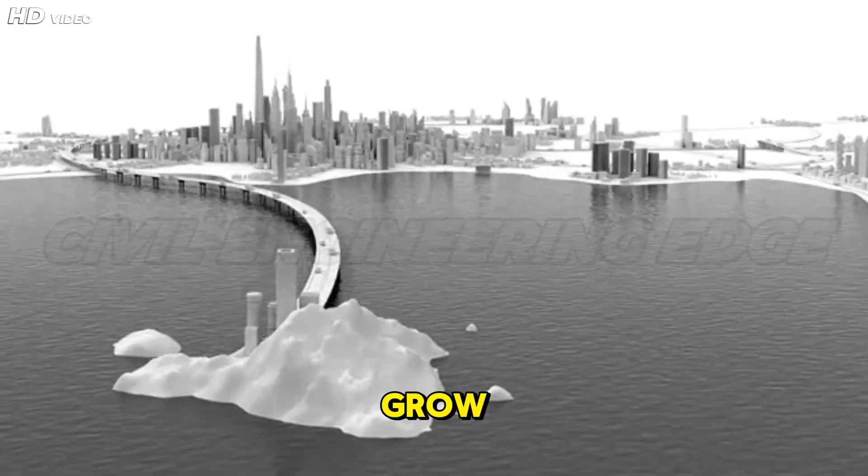The future of underwater cities, innovation and exploration. Underwater construction is no longer limited to tunnels and offshore platforms. As coastal populations grow, land becomes scarce, and climate change reshapes shorelines, engineers are beginning to imagine a future where entire communities and industries extend beneath the sea.

Technological advances are rapidly expanding what is possible underwater. Automation, artificial intelligence, and advanced materials are transforming construction methods that were once slow, risky, and human-dependent. At the same time, environmental awareness is redefining how underwater structures interact with marine ecosystems.

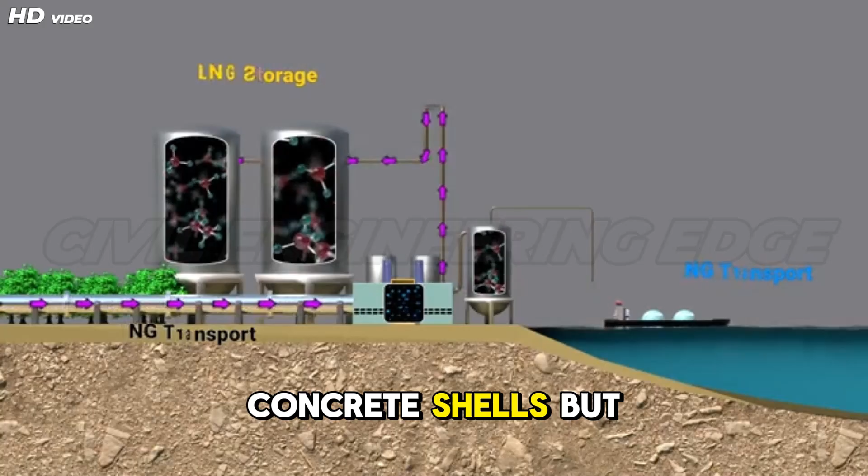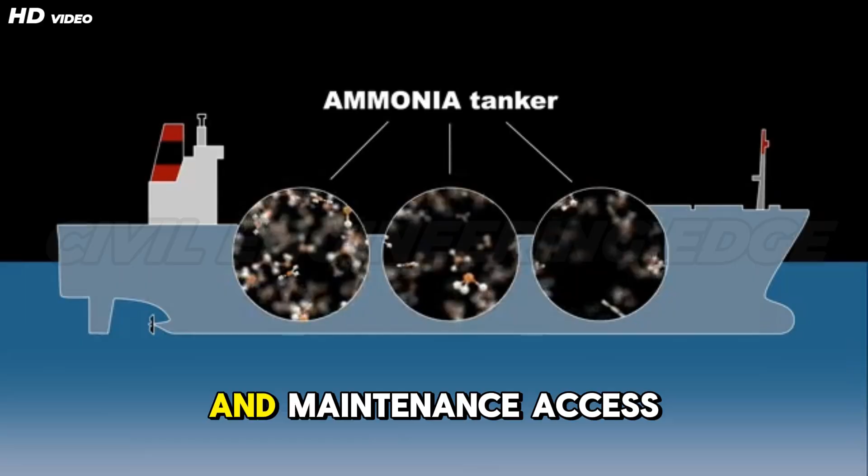Future underwater cities will not be isolated concrete shells, but integrated systems combining transportation, energy generation, habitation, and environmental monitoring. These systems must be resilient, self-sustaining, and adaptable to extreme conditions. Engineering challenges remain immense. Pressure resistance, life support systems, long-term habitability, and maintenance access all demand breakthroughs in design and construction.

However, the same challenges once made underwater tunnels seem impossible, and today, they operate successfully worldwide. The future of underwater construction represents a shift from defensive engineering, which resists the ocean, to collaborative engineering, which works with it. What once served only industry and transport may soon support human life itself. As innovation accelerates, the ocean floor may become the next chapter of urban expansion, designed not by science fiction, but

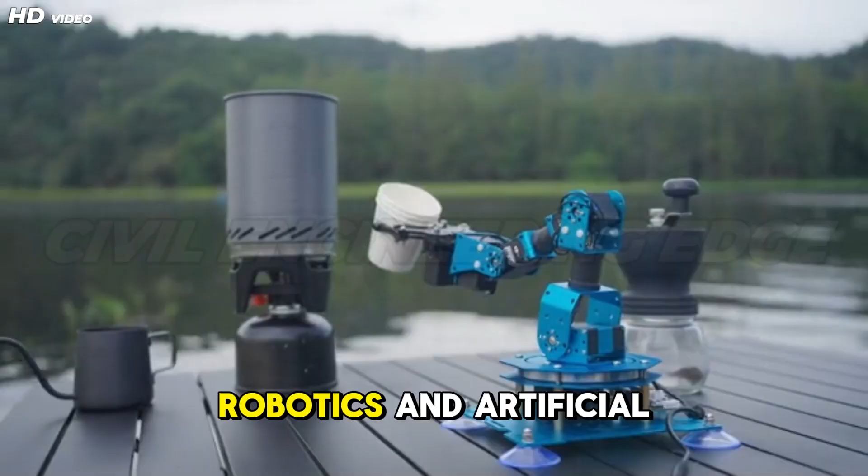by civil engineers. Robotics and AI: autonomous systems below the surface. Robotics and artificial intelligence are redefining underwater construction. Where human divers once performed dangerous, time-limited tasks, autonomous and remotely operated systems now take the lead. These technologies improve safety, accuracy, and efficiency in one of the world's most hostile environments.

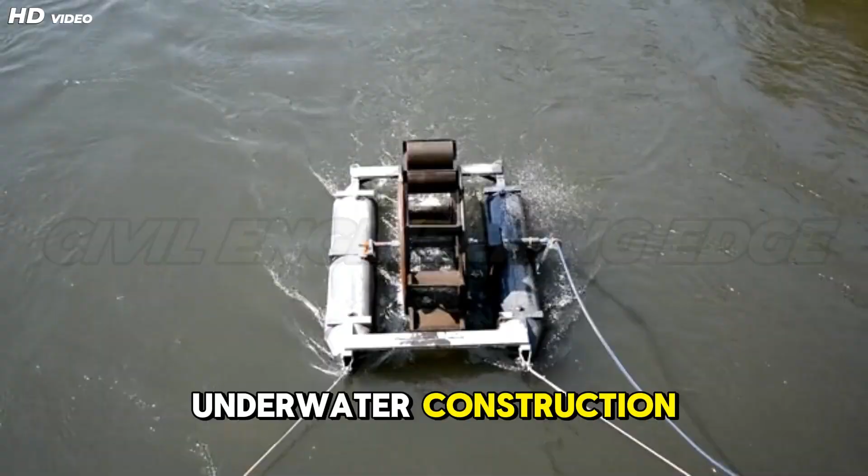Remotely operated vehicles, or ROVs, are already standard tools in underwater construction. Equipped with cameras, sensors, and robotic arms, they inspect structures, assist in welding, and monitor joint integrity. Autonomous underwater vehicles, or AUVs, go a step further by navigating independently, mapping seabeds, and detecting defects using AI-driven analysis.

Artificial intelligence enhances decision-making. Machine learning algorithms analyze sensor data to predict corrosion rates, structural fatigue, and maintenance needs long before failures occur. Digital twins, virtual replicas of underwater structures, allow engineers to simulate performance under real-time environmental conditions. Robotic systems are also being developed for underwater concrete placement, precision cutting, and automated inspection. These systems can operate continuously, unaffected by depth, pressure, or human fatigue.

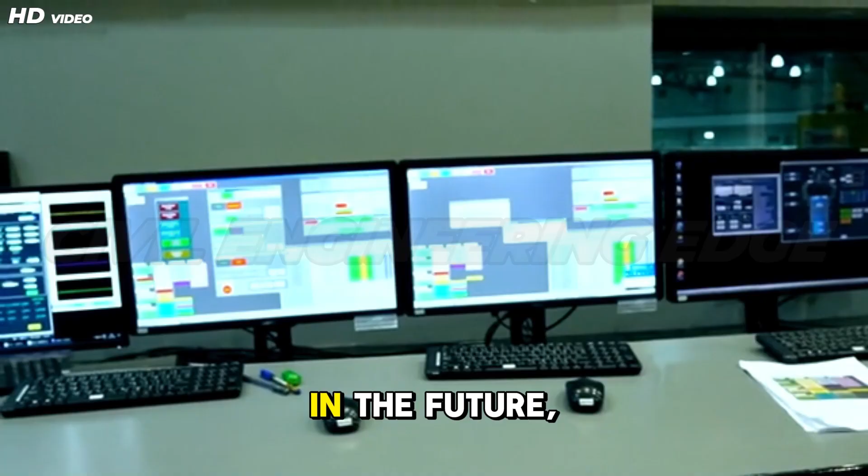In the future, entire construction sequences may be coordinated by AI, optimizing installation timing based on tides, weather, and seabed behavior. Maintenance could shift from reactive repairs to predictive intervention. Robotics and AI are not replacing engineers, they are extending human capability into depths where direct presence is impossible.

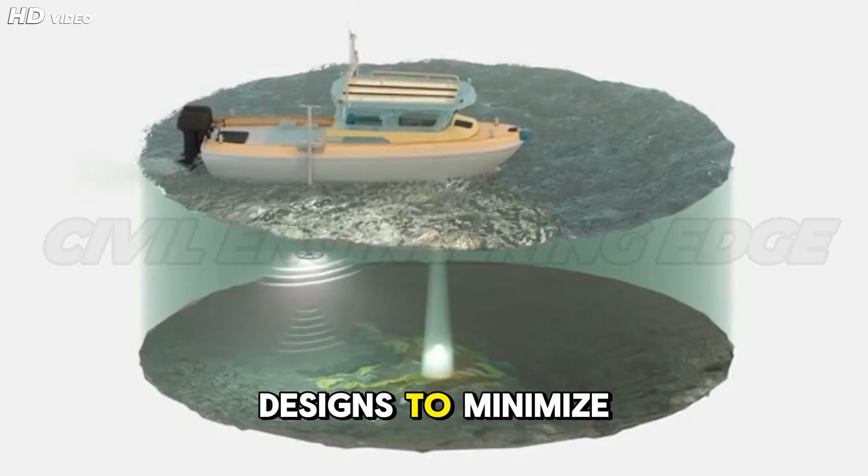Sustainable practices: building with the ocean, not against it. Sustainability is becoming a defining principle of underwater construction. Early offshore projects focused solely on structural performance, often disrupting marine ecosystems. Today, engineers are rethinking designs to minimize environmental impact and even enhance marine life.

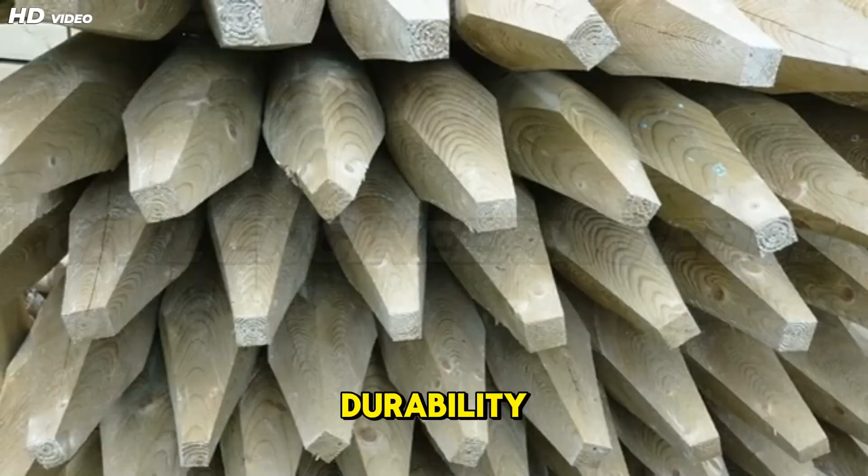Modern underwater projects begin with extensive environmental impact assessments. These studies guide construction methods that reduce sediment disturbance, noise pollution, and habitat destruction. Techniques such as controlled pile driving, bubble curtains, and precision dredging help protect marine organisms. Materials also play a key role. Low-carbon concrete mixes, recycled aggregates, and corrosion-resistant composites reduce environmental footprint while increasing durability. Longer service life means fewer repairs and less intervention in sensitive marine environments.

Some underwater structures are now designed as artificial reefs. Textured concrete surfaces encourage coral growth and marine biodiversity, transforming infrastructure into ecological assets. Offshore wind turbine foundations often become thriving marine habitats over time. Energy efficiency is another focus. Underwater facilities increasingly integrate renewable energy sources, such as offshore wind and tidal power, to support operations sustainably.

Sustainable underwater construction reflects a philosophical shift. The goal is no longer just to survive the ocean, but to coexist with it responsibly, ensuring infrastructure development does not come at the cost of marine ecosystems.

The next frontier: submerged habitats and resource platforms. The idea of fully submerged habitats is moving from science fiction toward engineering reality. Research facilities, underwater hotels, and experimental living modules already exist, offering glimpses of a future where humans may live and work beneath the sea for extended periods.

These habitats demand revolutionary design approaches. Structures must withstand pressure while maintaining comfortable internal environments. Life support systems must regulate oxygen, temperature, humidity, and waste with minimal external input. Emergency evacuation and long-term maintenance remain critical challenges.

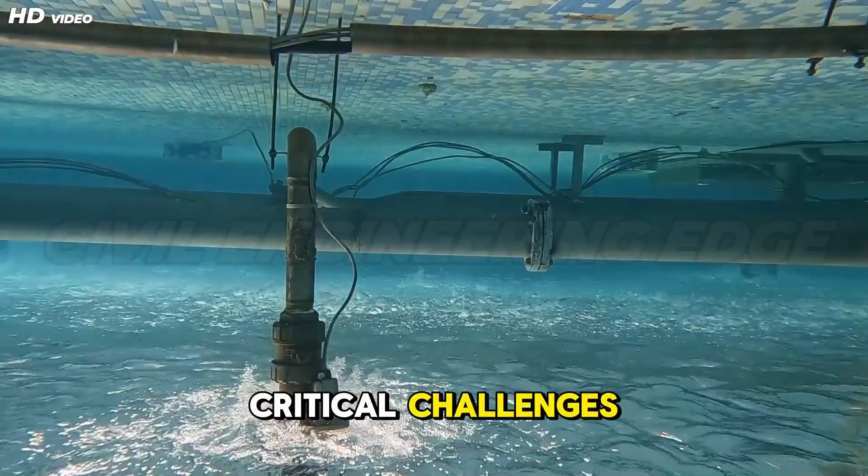Beyond habitation, underwater construction will support advanced resource extraction platforms. Deep-sea mining, subsea energy storage, and offshore renewable hubs require robust, remotely operated infrastructure. Engineers must balance resource demand with environmental responsibility. Floating submerged hybrid structures may become common, combining surface access with deep water stability. Modular designs will allow expansion, repair, and relocation as needs evolve.

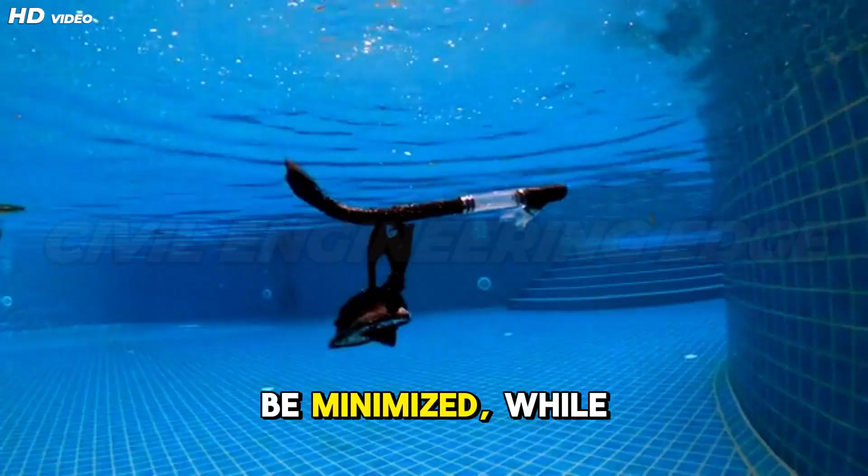These developments will rely heavily on advanced materials, AI-driven monitoring, and robotic construction. Human presence will be minimized, while systems operate autonomously for long periods. The ocean represents Earth's largest unexplored frontier. As land resources diminish and technology advances, underwater construction may redefine how humanity expands. The next great cities may not rise into the sky but descend beneath the waves, engineered by visionaries who dare to build where few have ever lived.

Every structure you see around you, every bridge, tunnel, and tower started as an idea on paper. And today, you took one step closer to understanding how those ideas become reality.